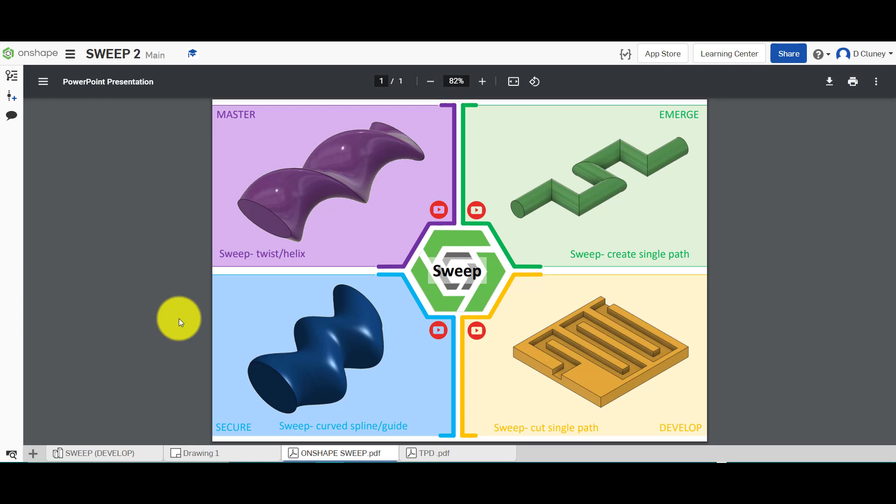So if we have a look at the tabs on the bottom, we've got the drawing for this part so we can make reference to the dimensions. We've also got a copy of the final outcome as a model, so we can also use that as a reference as well. So if we click on the plus, we can go on to Create Part Studio.

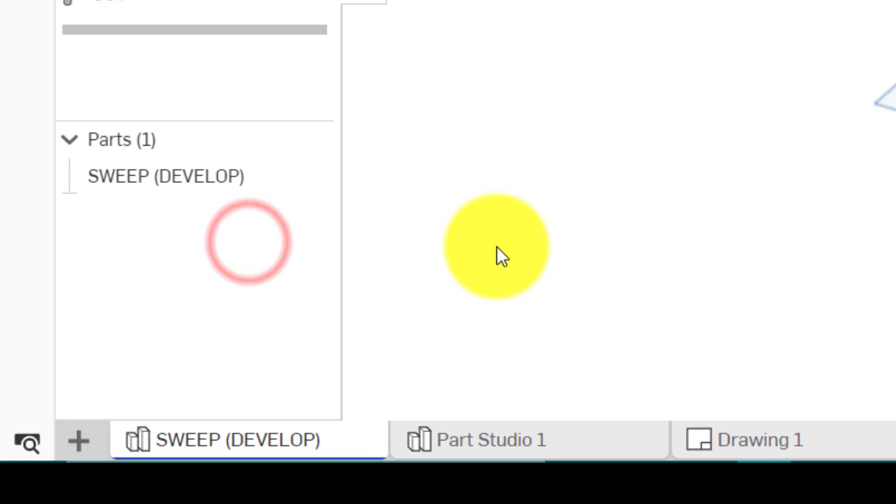That will appear as a tab at the bottom. We can right click on that, rename it as Tutorial, and then we're ready to start. So the first thing we need to do is check out the dimensions. So the base, which is an extruded square, is 200 by 200.

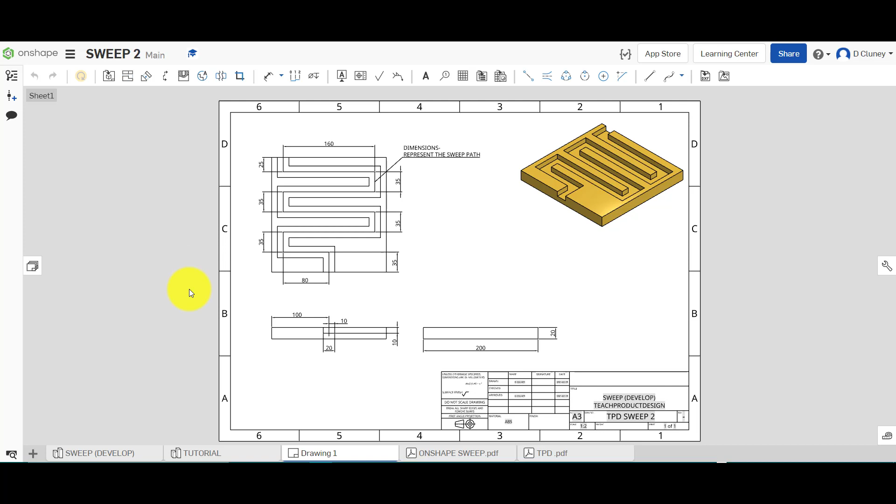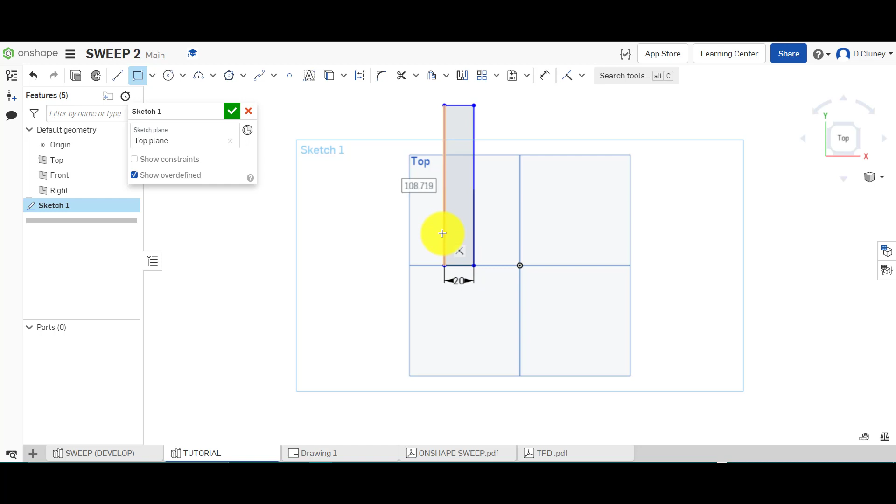So I'm going to click Sketch, click on this top work plane, press N to flatten that, to normalize it. I'm going to go for, on this one, a corner rectangle, and we're going to dimension it from here, because this will make it easier using the origin later. So we're going to type in 200 by 200. Now I just need to obviously change that to 200 rather than 20.

And I'm going to click the dimension tool, or D for dimension, and I'm going to dimension it from the centre, 100, like so. We're then going to go and extrude that, and I just need to check the dimension. So it's 20 millimeters, as you can see there, in height. I'm going to type in 20,

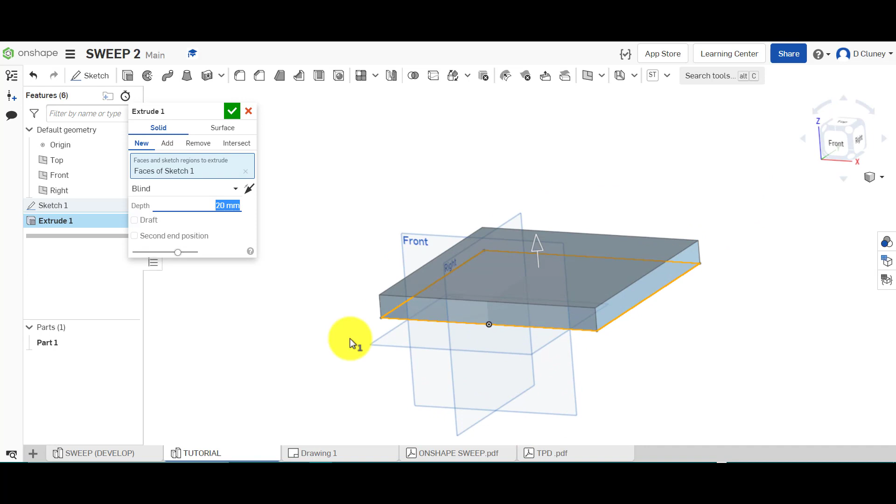and I'm just going to turn this around. Actually, look where my origin is, and if I look at where the origin is here, I can see the origin is along that edge as well, so that's fine. So I'm extruding it above rather than below like that, and that'll just make life slightly easier, as you can see. So we're going to save that.

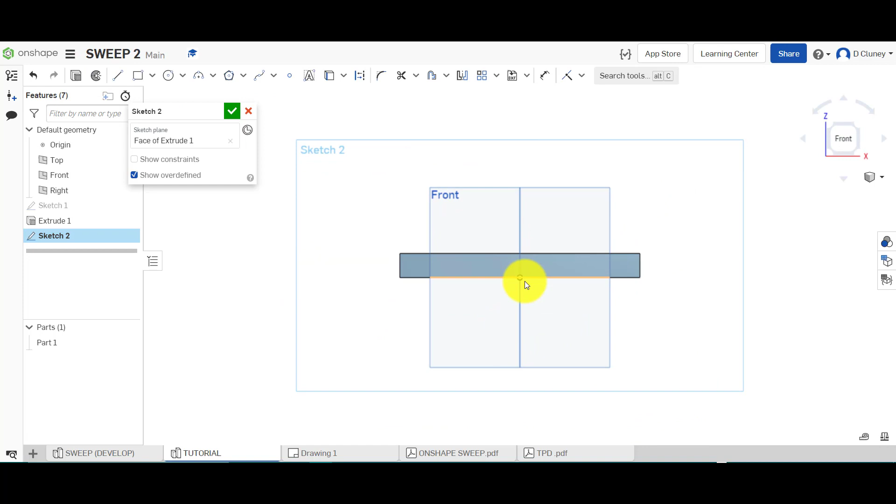I'm going to create a sketch on this front face, and again press N to normalize. And we're going to start with, again, a corner rectangle, and if we check the drawing, if we zoom in on here, that's got to be 20 millimeters wide and 10 millimeters, so 20 mil, and you can see 10 millimeters deep. There we go.

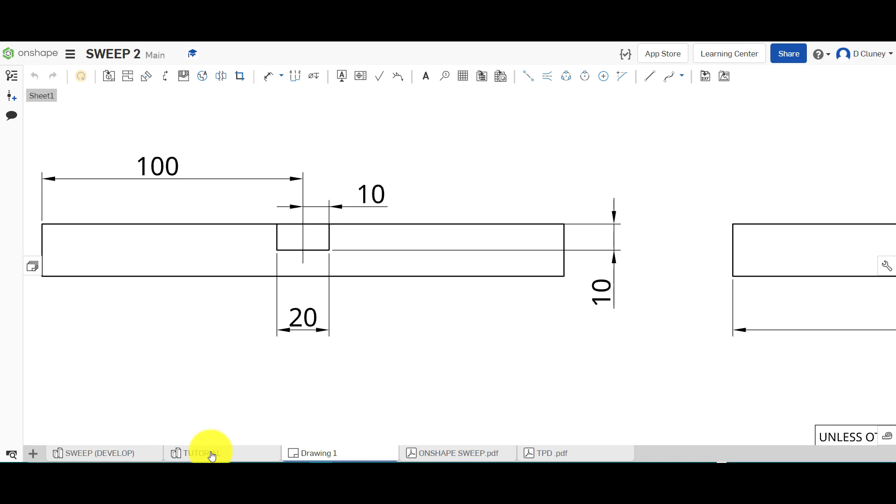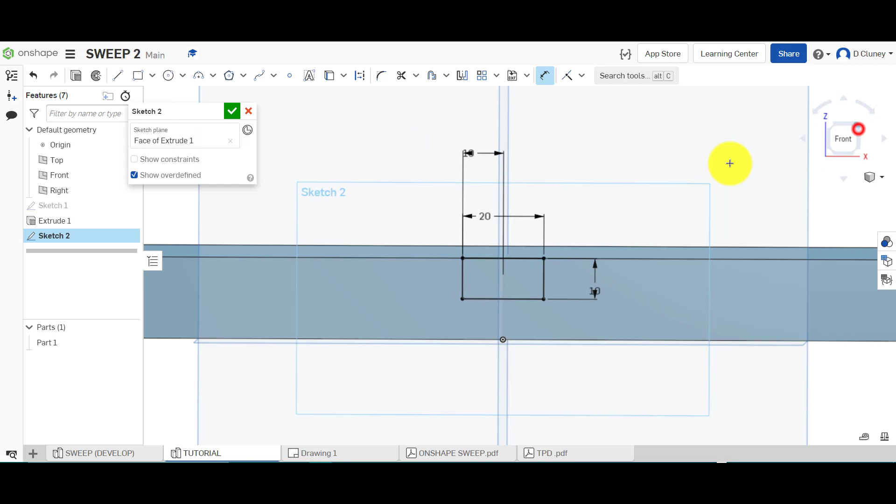So I'm going to dimension that 20 by 10 millimeters in that way, and I'm also going to dimension it from the center as well. 10 millimeters, so that's in the center, and I'm going to save that. So that sketch is going to be my profile.

So the path, we're going to click on this top plane, or top surface should I say, and you can see here the origin again is there, so I'm going to use my origin as reference. And if we come to the drawing and we press F for fit, so it's going to fit on the screen, and just zoom into this here. So like you see, we've got a line coming up, and the dimensions here referencing the actual path.

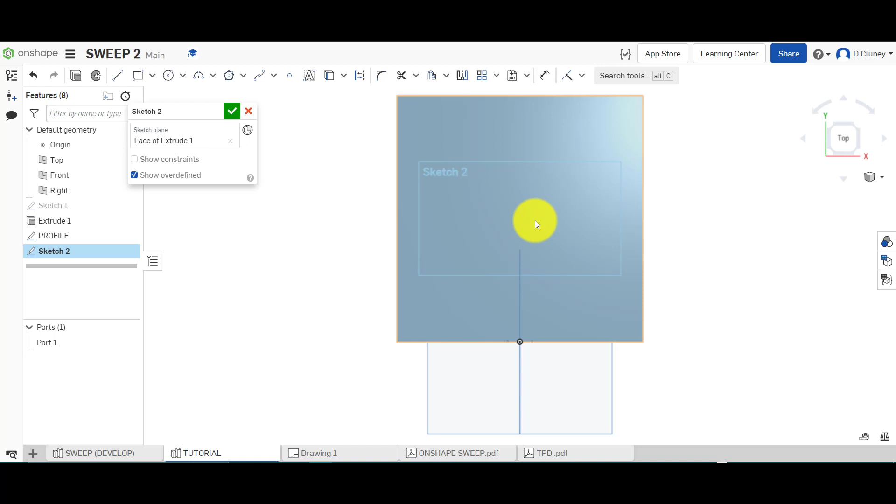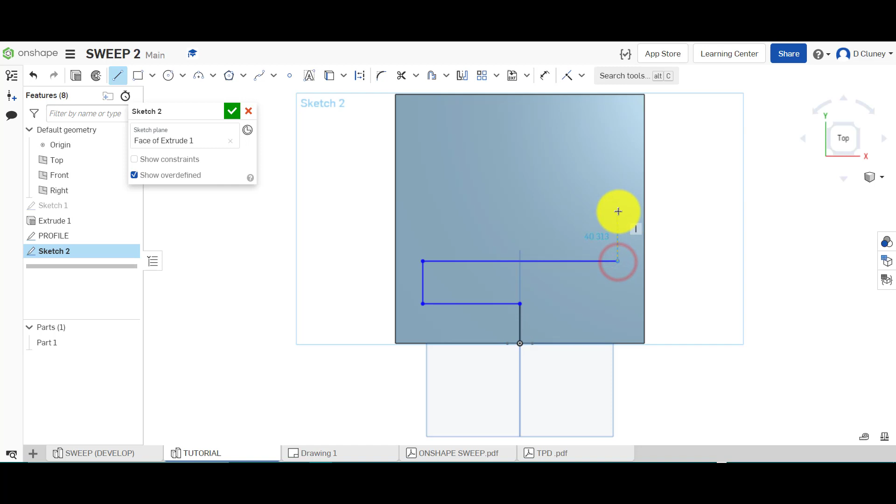So we've got a line coming up, and we've got 1, 2, 3, 4, 5, 6 sort of verticals. So let's have a go at drawing that. So I'm just going to press F for fit, there we go. L for line, and we're going up to the left of the drawing. So you can see I'm clicking here and I'm dragging these lines out, and I'm sort of waking up these references here.

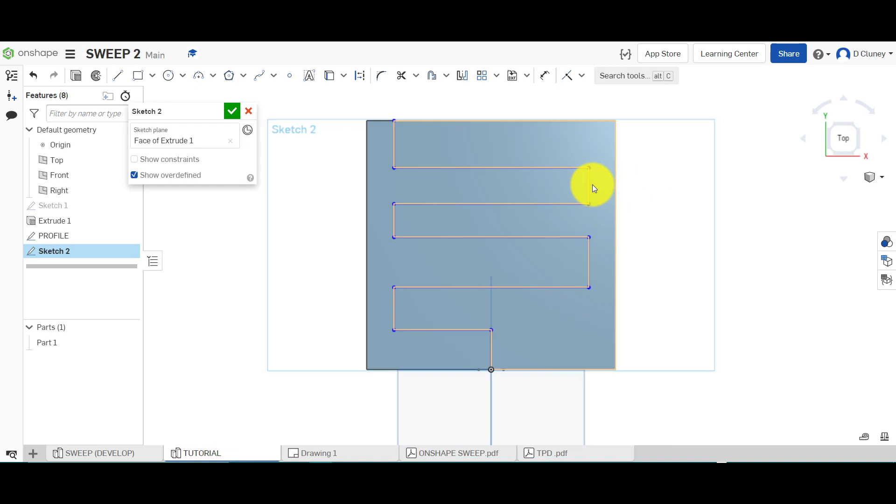Like so, and I'm going to snap to that top edge there. I'm going to click Escape. Let's check the sizes out. So 35 millimeters, all these verticals apart from the top one. So what I'm going to do is I'm going to select that one, and that one, and I'm going to go equal. Okay, 35mm.

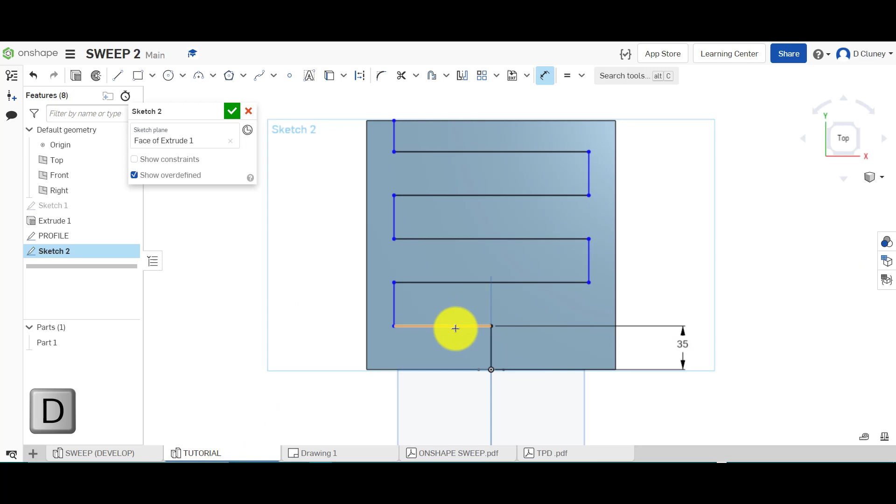Check the next dimension out, so it's 80, that one, and then the others are 160. So I'm going to dimension this one to 80, and a total one to 160. So as you can see, that's fully defined now. There are no blue lines, so that will not move anywhere. So we've defined every dimension.

And you would see when I was sketching this out using a line tool, and I was coming along here like that, I was making reference to some of these points. So therefore all these lines were going to be the same. So if you don't do that and you drag out these lines, you don't make reference to some of the edges, you will need to dimension probably all these horizontals the same again if you don't use the equal for these ones as well. So you have to do more dimensioning.

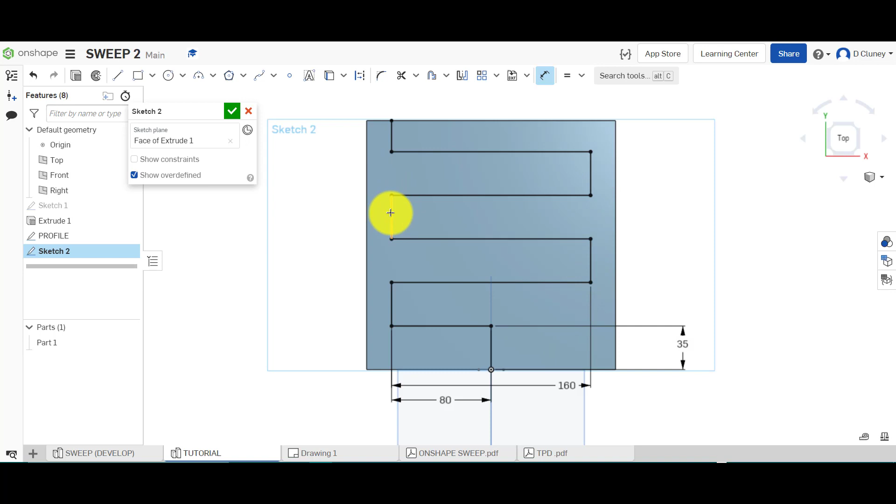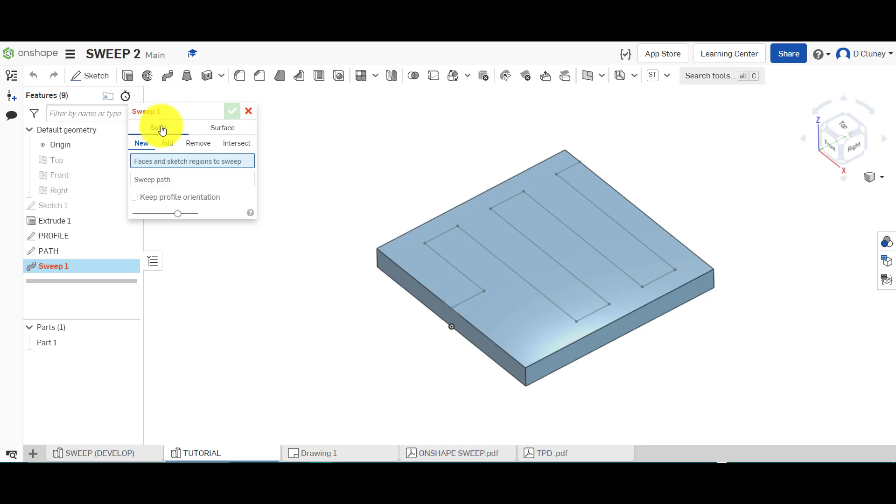So that's done. I'm going to right click and rename that here to path and click off that to confirm it. Just going to go up to this angle here. Actually, I'll spin it around using my mouse. I'm going to hide these so they don't get too annoying. I'm going to go up to sweep. So this time we are going for a solid, but we want to remove this time. So faces is going to be my profile here. And what we're going to go for is the path.

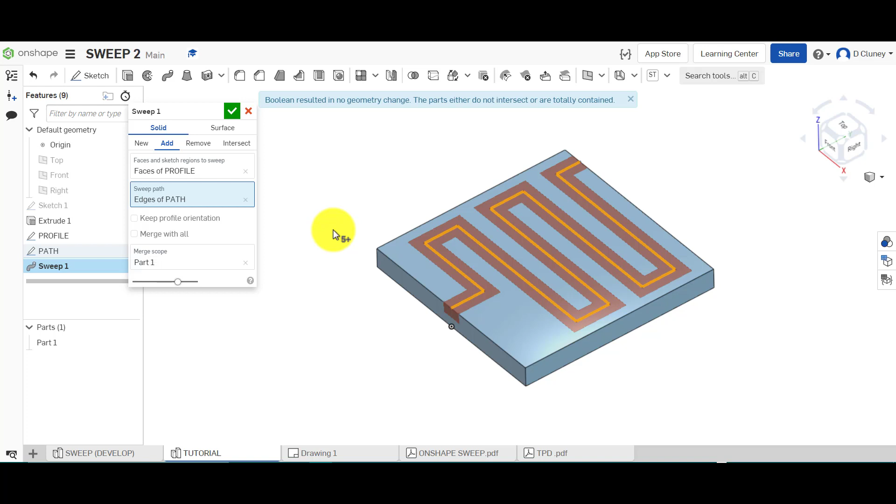And again, I could click on each one of these and go along, or if I get rid of those, I can actually select it there as well. And as you can see, because I've clicked remove, it has removed that material to create that sort of channel or that maze going around there. If I click add, it would come up with an error because basically what it's saying is you're adding material into material that's already there, so it would result in nothing.

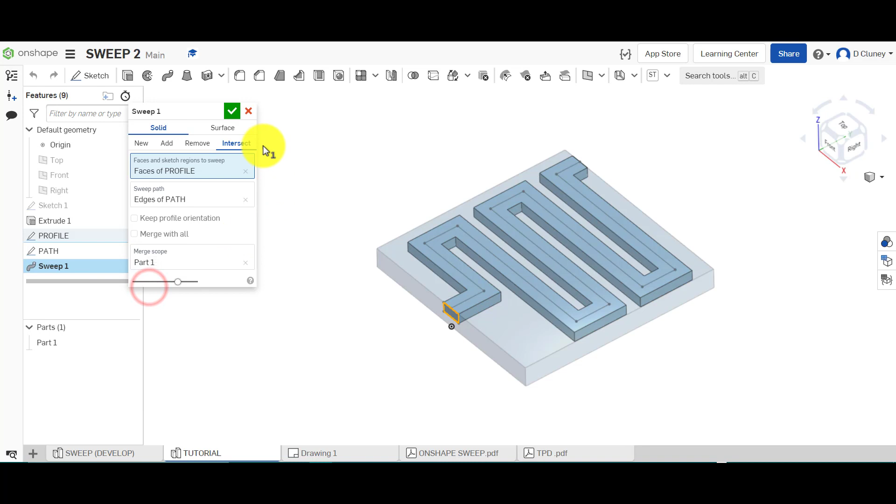If I click new, a part will appear here, because it would be creating a separate part. And if I click intersect, if you see the tick, it would actually create the geometry for the actual channel, what I want to actually remove. So I need to go back into there and click remove and tick that. And there we go, we've created that second one.

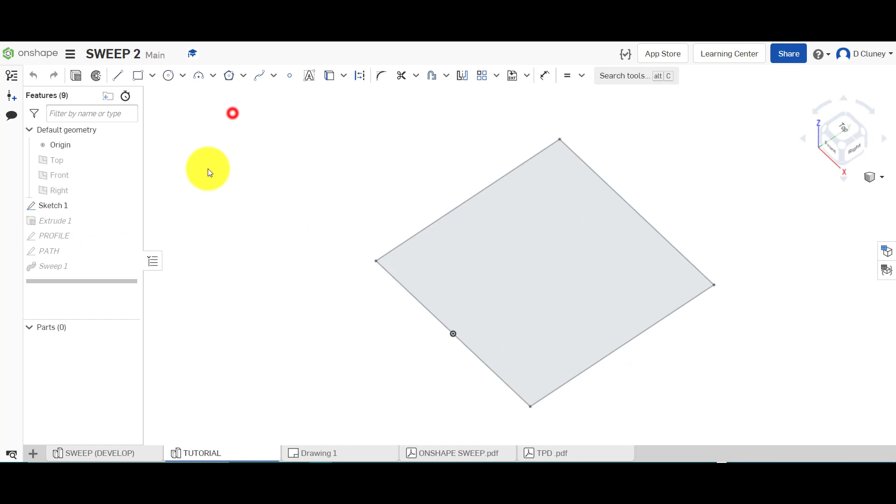And again, if you need to go into the base and change the base in terms of the thickness, you can click on the extrude. You can change the size of the original sketch again by going into edit and updating those dimensions if needed. And again, the profile and the path can be edited in addition to the sweep. So if we come back to this one here, you can see that's what I've created.

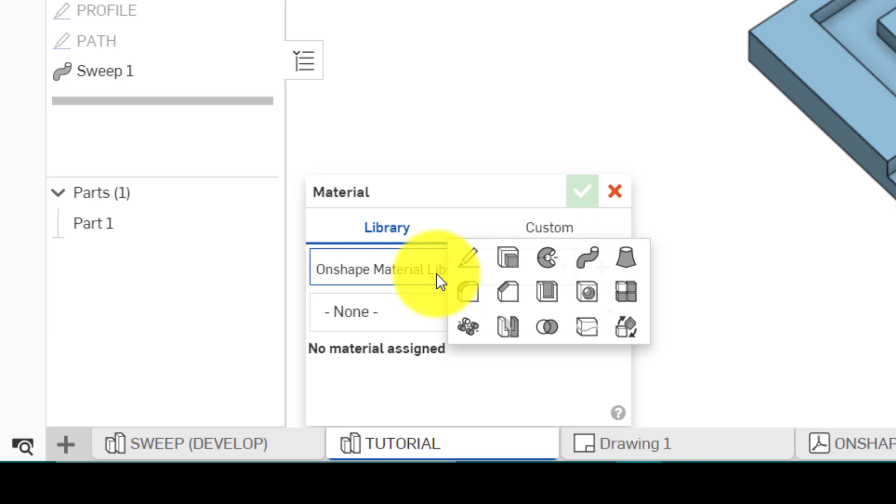If we go to mass properties and check the mass, that's 0.648. Just need to apply the material. So ABS. If I get to A, oops, click on that, ABS, there we go, top one. Okay, and select that mass there. So 0.648, and that one

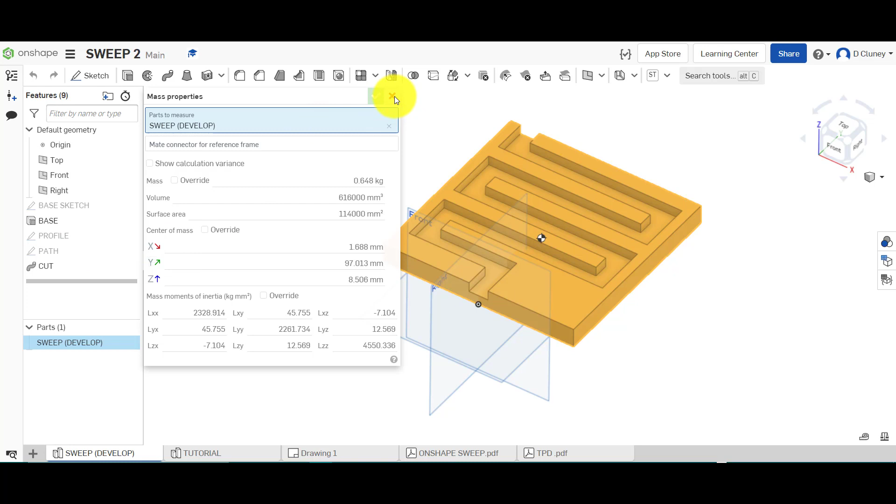0.648. There you go. So if the mass is not equal, then what you need to do is go back and check some of these different features and sketches and check the sizes, dimensions, and the options that you've selected. And if they do match, that's that one completed quite quickly.